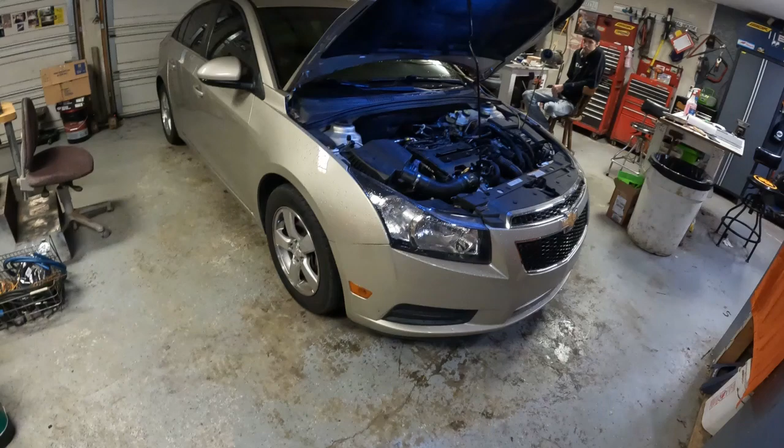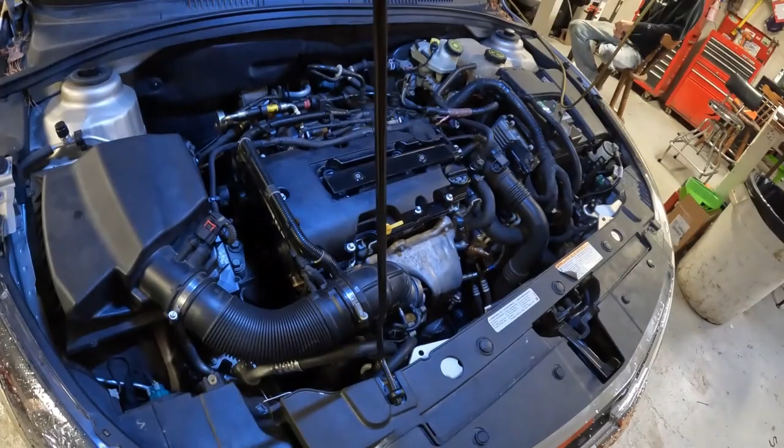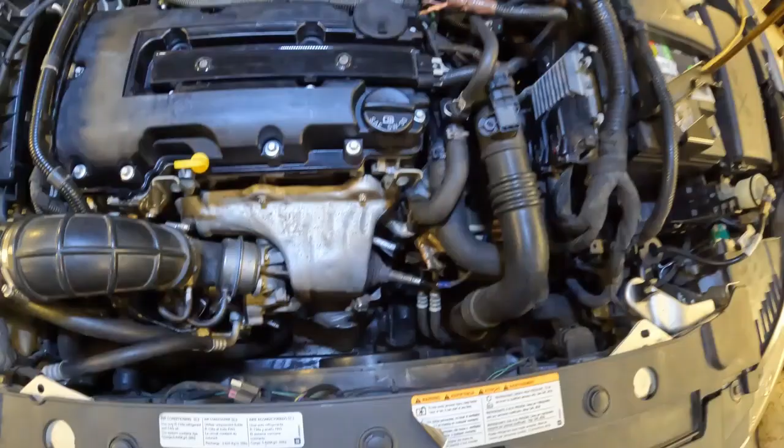This is the 2014 Chevy Cruze. Has a 1.4 liter turbo engine. We've put a water pump on it. We put a head gasket on it. We put the main housing for the oil filter that was leaking water into the oil. We've put the evap solenoid on it. We put a new valve cover on it.

But when you start changing stuff, if you change it randomly and the valve is out inside of the intake, then it just blows this other stuff out. It blows your crankcase ventilation valve there that's made into the valve cover, so you have to replace the whole valve cover. Then it blows the valve out in this crossover pipe that goes to the intake from the turbo. It's part of your evap system, part of your, I guess, EGR system.

But when that valve blows in that intake, it causes pressure to build up inside of the block, inside of the crankcase. It blows this PCV valve out. It'll blow oil out around your oil cap. And it can cause all kinds of oil leaks, which we've got an oil leak on the front of the engine that's coming out of the valve cover.

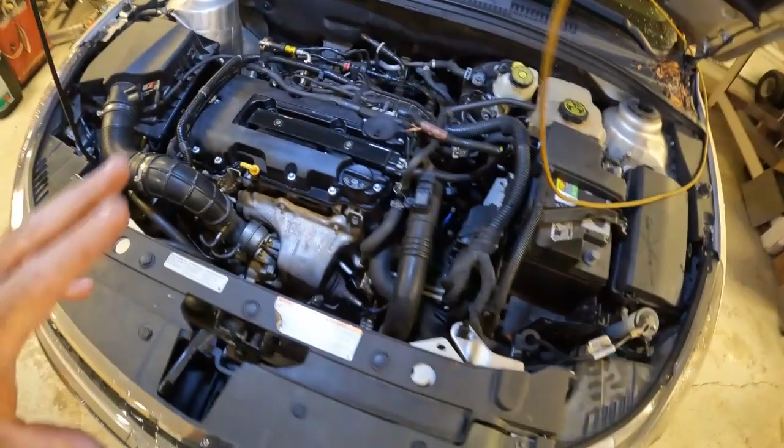So you can chase this like we've been doing. We've been chasing solenoids. We put a valve cover. We've done all this stuff and chasing it. But what you need to do is there's a one-size-fits-all kit for this particular motor. It's made by Dorman. It's an upgraded kit that has each piece, and you replace them all at once, and then eliminates the issue. Let's take a look at the kit.

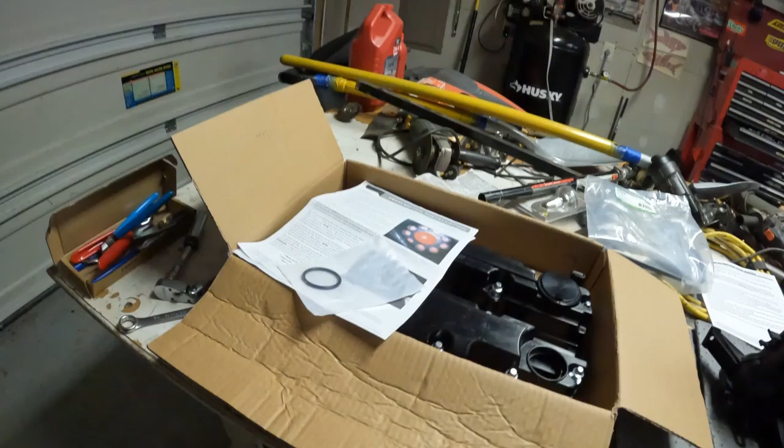This is the kit. It's a Dorman 615-380 kit, and it's for the 2011 to 2016, I believe. 2011, 2016 Chevy Cruze, and there's a bunch of other models that this fits that has this 1.4 Opel motor in it. So there's the kit. It comes all in one box. You get a new oil ring for the oil cap.

You get a new valve cover that has the new crankcase ventilation valve in it. And you have to replace the valve cover, or they sell a little kit, but why waste your time when you can get the entire kit? You also get a new intake that has the new valve in it.

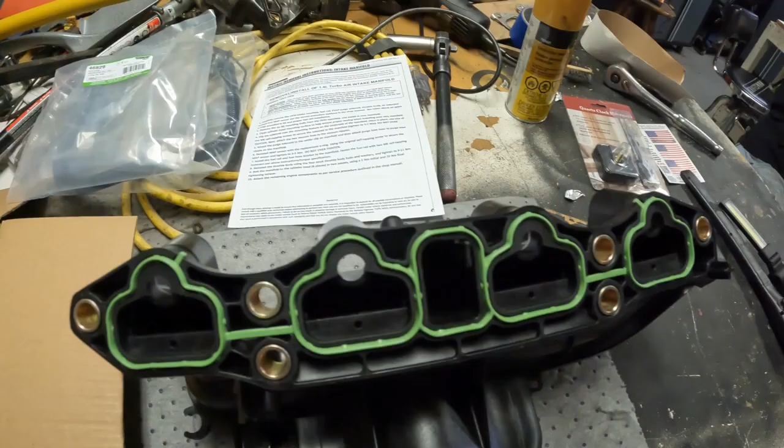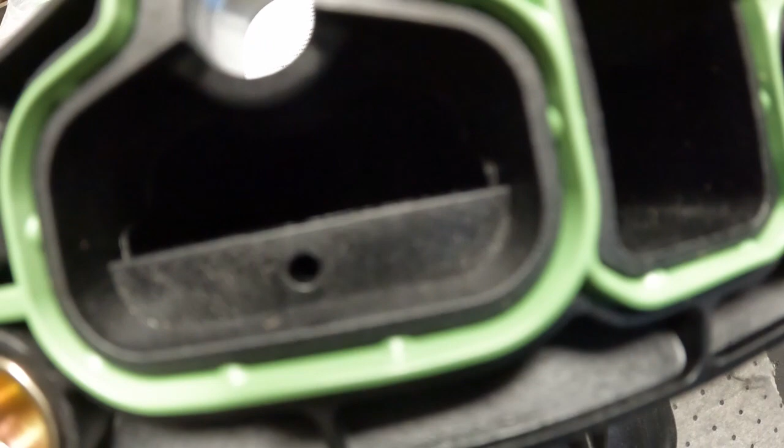And we look down inside the other intake, and that's the first thing you check, if that little orange valve is blown. Let's see if we can see it in this. Yeah, you can see it. I don't know if I can get a light down in there. There we go. Can you see the little orange valve down in there?

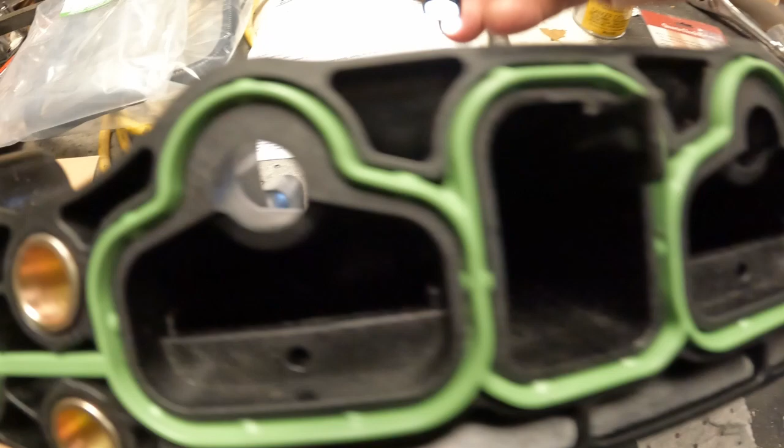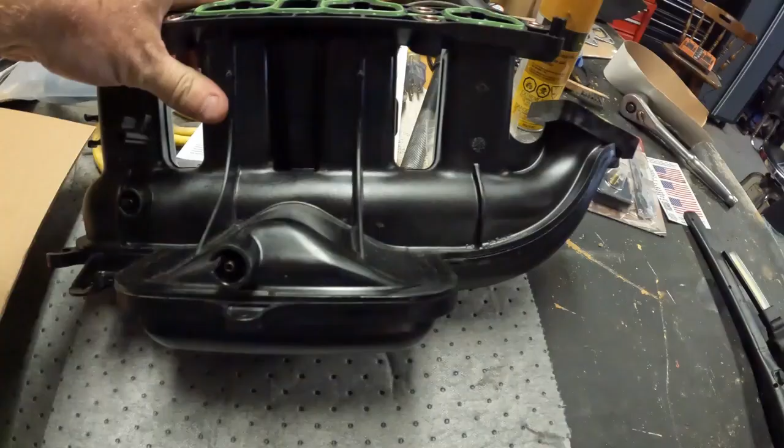Well, that little orange valve, if you look down in top of this hole in the factory intake, and that orange valve is not visible, then you've got turbo pressure, boost pressure going into your engine. It can also, when it's under vacuum, let it pull oil and other things into the engine, when we found oil in the turbo. So when that goes bad, it causes all this other stuff to happen.

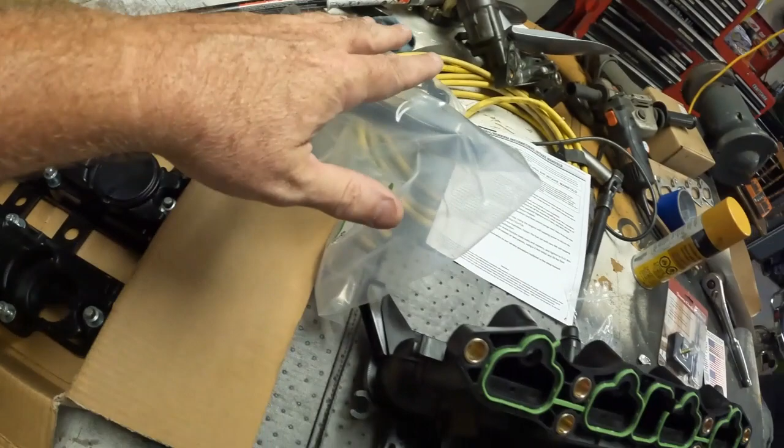This little hose here goes from the turbo. I'm not sure what this hose is called. It has a vacuum line on it, and it's part of your evap system, but it's got a one-way valve in it. And whenever that valve inside this intake blows, it blows this one-way valve out in this hose, and also blows this valve here out. So you end up replacing them all, but if you just replace them one at a time, you're just going around in circles, and you just keep chasing it, but you never find it.

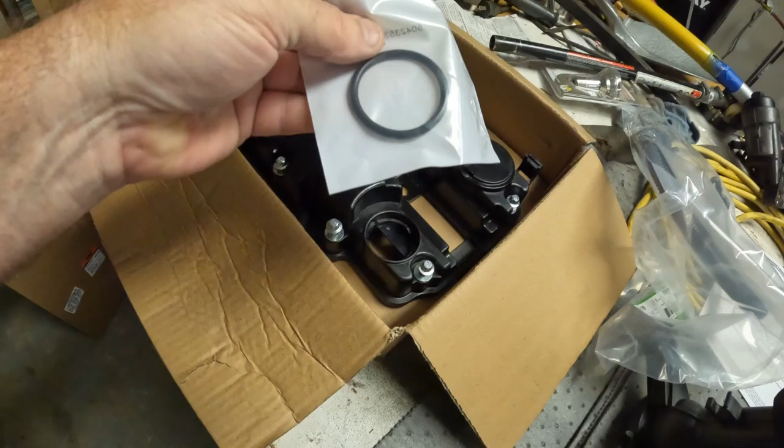But starting with this kit now, and they are aware that this is the problem. You replace the intake manifold, you replace this hose, you replace the valve cover all at once, and of course your oil cap seal, and then you shouldn't have this problem anymore, at least for a while, unless you've got other issues going on with your engine. So that's what we're going to do today.

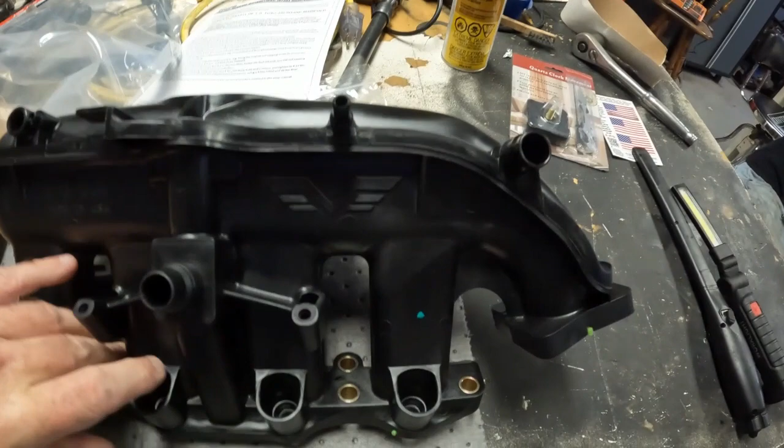First thing we're going to do is drag this intake off. Got a few things to disconnect. You do have to take the injectors. I'm hoping we can take the injectors off of the intake and replace them right here on the table. Tyler's removing the fuel line. We've got some of the other lines loose. We got one of them little tools that should pop it right up off there. Careful, it'll probably spray fuel on you. Be sure to disconnect your battery whenever you're fooling with this stuff. Always do that first.

Okay, Tyler's already taken the air box off. He's taken the intake tube off that goes from the air box to the turbo. You can see down in the turbo there's oil. There shouldn't be oil in there, but it's coming through this tube right here. That means that one-way valve in this tube is probably blown.

So this is one of the parts in that kit. You've got to take this tube off and replace it. So that's the first thing he started doing. It's got a little vacuum line that goes down underneath the intake that's got to come off, and then this piece will be off here. We're going to start taking this intake off, and then we'll be back.

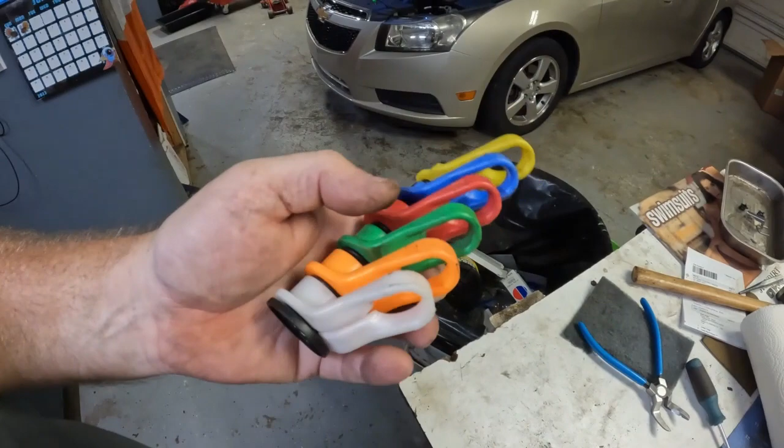He's got the fuel line off. They sell these little kits right here. I think this one came off the Mac tool truck or Matco one. They're cheap. They just go up inside that fuel line so you can lift it off. They release a little clip inside of it. These are made for all different size fuel lines and all kinds of different lines.

Okay, we've got the intake off. Getting the intake disconnected was no problem, but the stupid clips that hold the wiring harness to the back of it were a pain in the butt. So Tyler's going to take this valve cover off, and he's got to take the coil out. And here's the other one. There's a whole bunch of stuff that's got to be transferred over to this new intake.

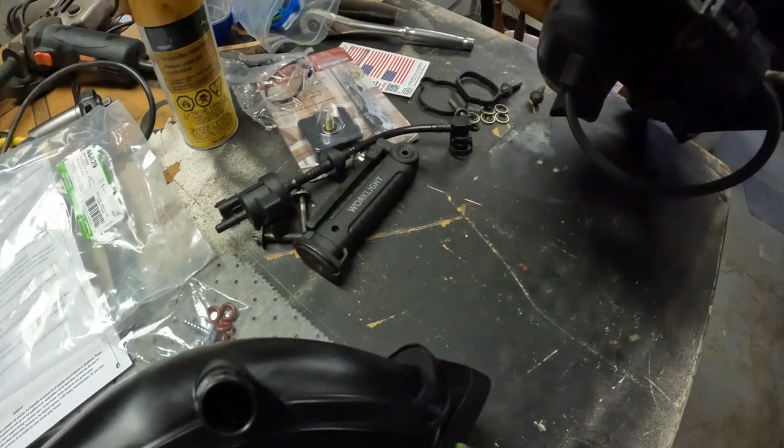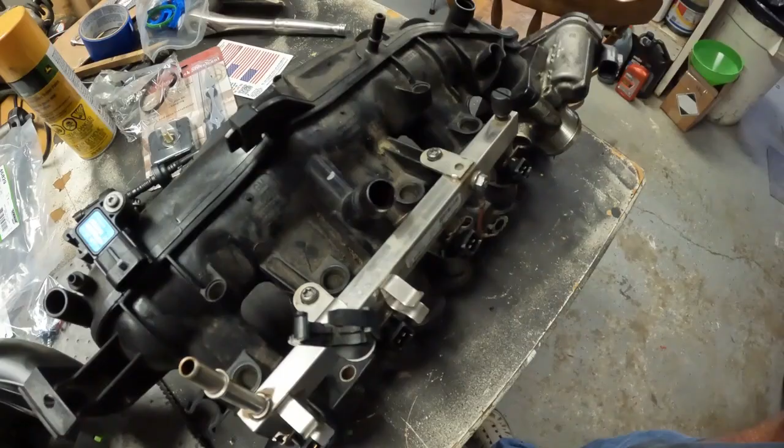You've got the fuel rail. I guess that's mass airflow. There's a couple other things. I guess this little rubber grommet. This little thing. There's some more valves on the bottom. And I'm probably pouring gas everywhere. A couple hoses and a valve on the bottom. And that's about it. What I'm interested in is that little orange thing in there. It is gone.

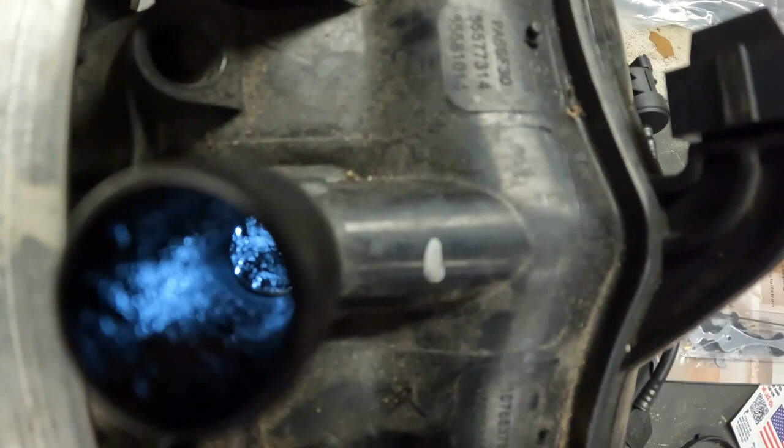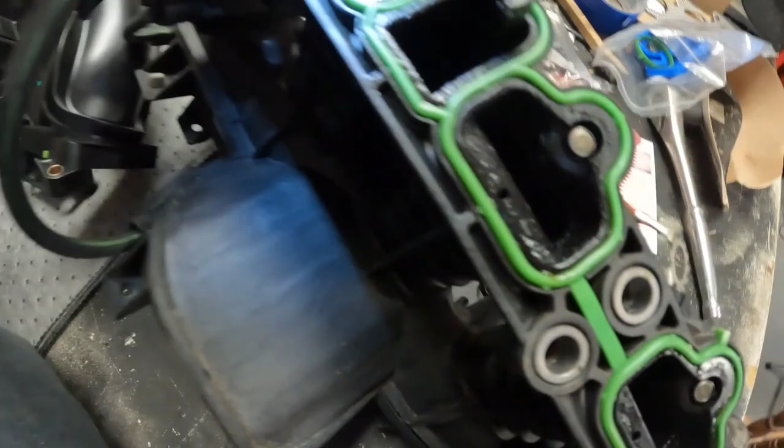Get it where it'll stay here. It's a Bosch fuel rail. You look down in there, it's hard to see. There is no orange diaphragm. Let's see if I can shine down this way. Look at it without pouring fuel everywhere. Yeah, it is gone. So that was eaten by the motor, and when that blows, everything else goes out. Starts messing with everything else.

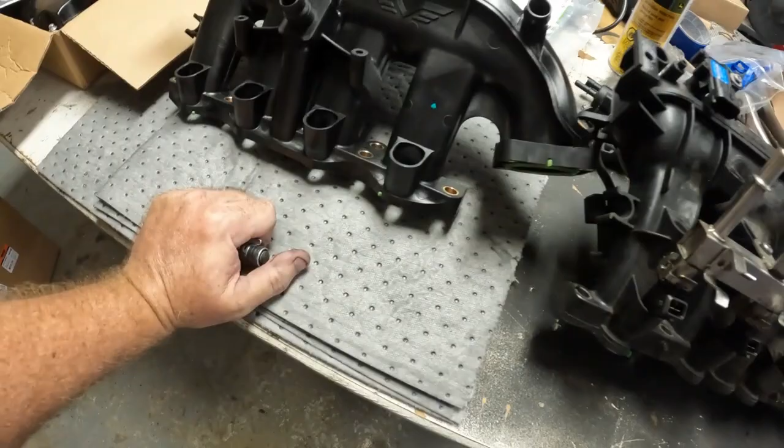So I'm going to get started switching this stuff over, these injectors, to this new intake, and Tyler's going to get the valve cover off. And we're going to take a look at the motor when he gets the valve cover off, and we'll come back then.

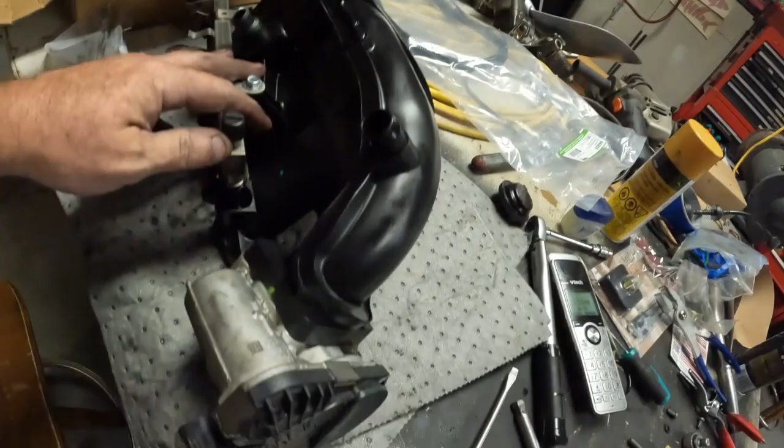Tyler's putting our valve cover back on. While he's doing that, I switched this over. We put the fuel rail on, I guess map sensor, throttle body. There's a little piece in here on the bottom that goes on a little vacuum solenoid. And all that's on there. Put the fuel rail in.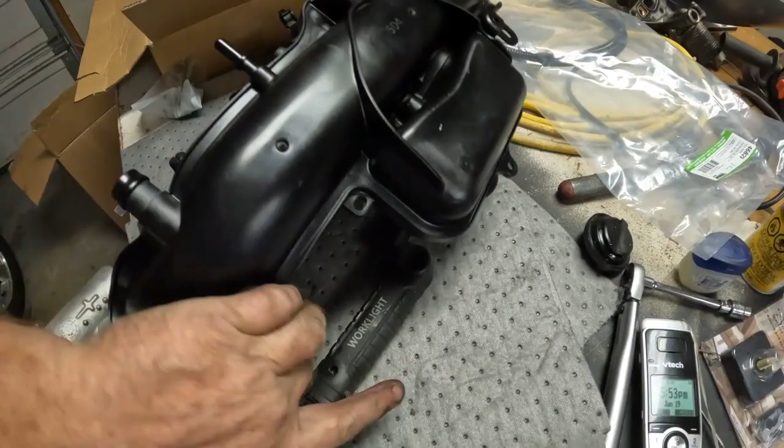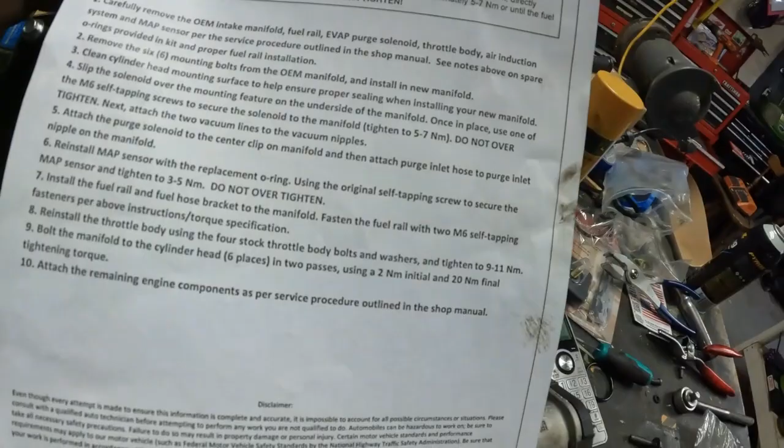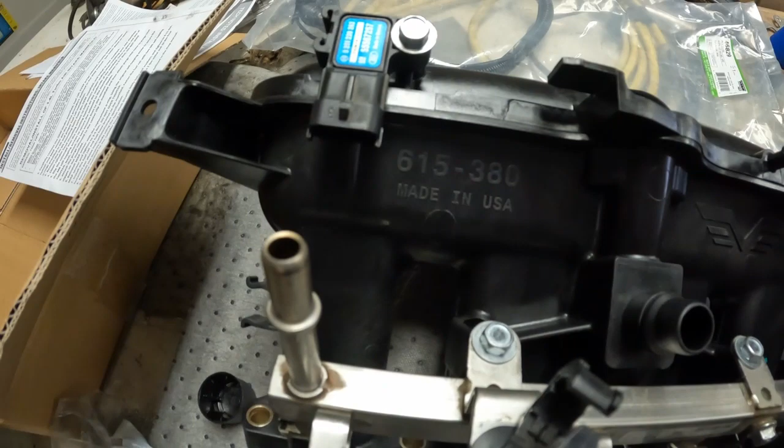Now the cool thing about this kit is you don't have to have a manual to use it, because it comes with all your torque specs. It only gives Newton meters, but that's fine. If you've got a little inch-pound torque wrench, you can use it in Newton meters. And so we put the little bolts in. It does come with self-tapping screws rather than the threaded inserts in the factory intake. But this intake does say made in USA. It's a Dorman product. And so far everything fits nice.

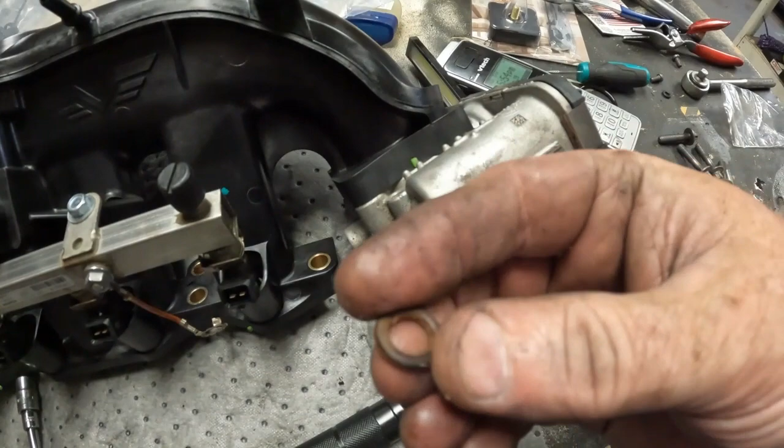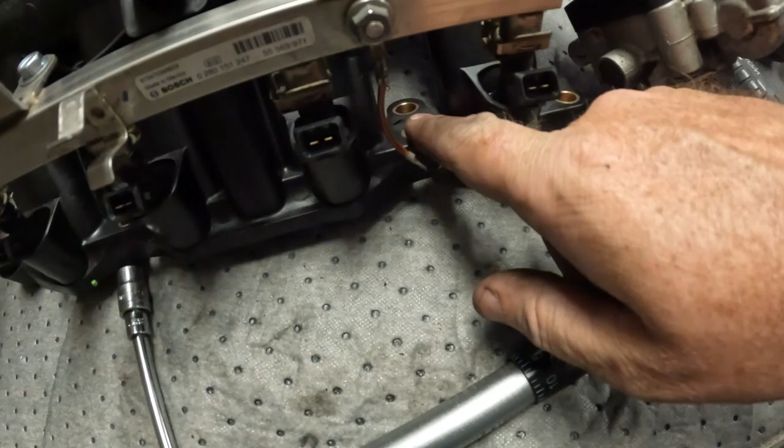Everything went in. It does come with new O-rings for your fuel rail. You can take the old O-rings off. I didn't realize it had those, but it had a little bag of O-rings and screws in it. And we've got these intake bolts. Six of those intake bolts go in, one on each end, and then four in the center. And he's just about to get the valve cover on. And in a little bit, we'll get ready to start putting this intake on.

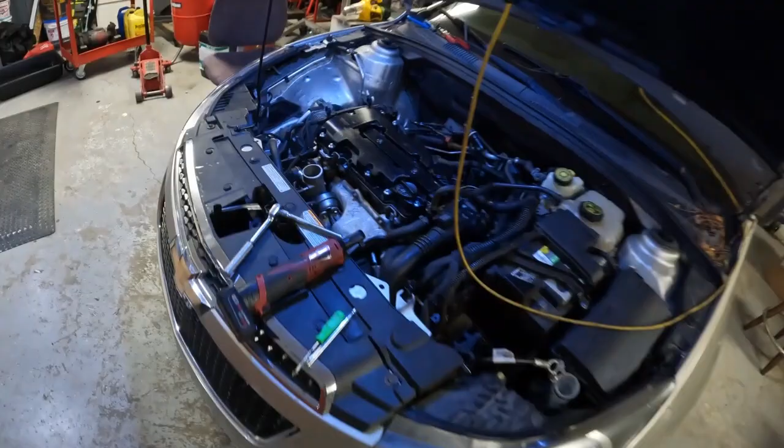Okay, the valve cover's back on. A new O-ring on the oil cap. You've got to make sure you put that on.

Now, I'm losing more batteries than I am time on this.

Now we're going to go ahead and try to get this intake in, now that we've got everything switched over. The intake manifold is back on and reconnected. There's a few little things under the bottom that you have to put wire ties on. And Tyler's hooking the cold air intake up now, the cold air that's coming from the intercooler. So he's getting that side done, and got a few wire connections made.

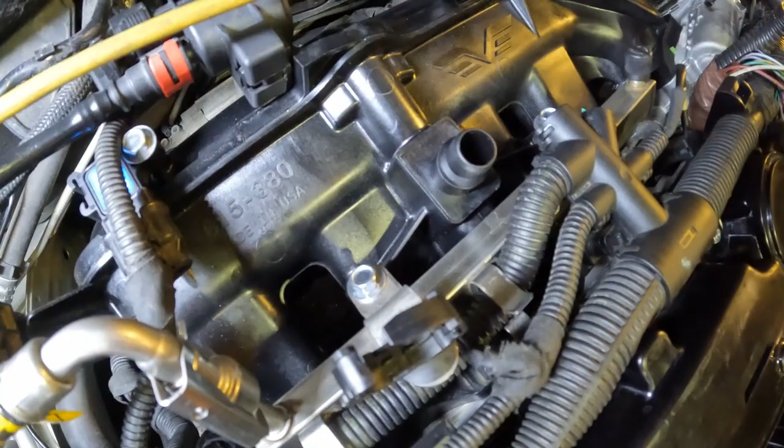Now we did have to torque this. You have to have an inch-pound torque wrench. You start off when you put your bolts in. There's six bolts, one on each end, and then four in the center. Those bolts will torque to 2 Newton meters initially, and you get them all seated at 2. Then you go back through and torque them again. Start from the center out, and in a spiral pattern, torque them to 20 Newton meters, and that'll get your intake set.

And you got to have an inch-pound torque wrench. You got to have a few little specialty tools to do this job here, but that's really one of the biggest things, the inch-pound torque wrench. I just bought a cheap one. We already had one, but it didn't go down to 2, so we got a smaller one.

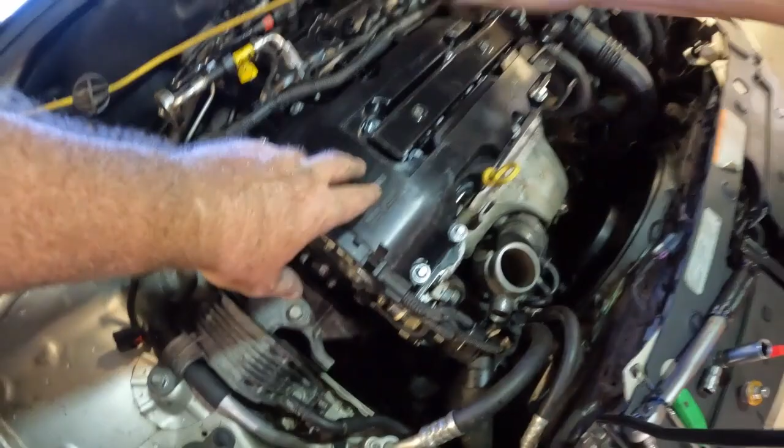But now we got to put, I guess, the air intake system back on. Then we got to put that crossover pipe, that little pipe that we told you the valve goes bad in. So to recap, we put the valve cover on. We put a new intake on that's, I guess, a newer design from Dorman. And then we'll put that crossover pipe in. It goes from the turbo back to the intake. And that should fix all of our breathing issues and keep it from squirting oil out everywhere just because it's overpressured inside the block.

Here's our Dorman part that came in the kit. It's that little crossover pipe. I'm not sure what this little pipe's called. Maybe it says up here. PCV hose is all it says. And that's the part number, 46829. It's a Dorman product. Of course, that's made in China.

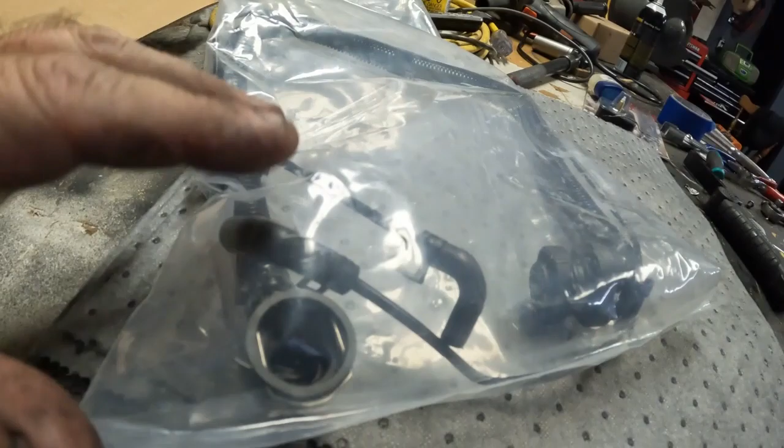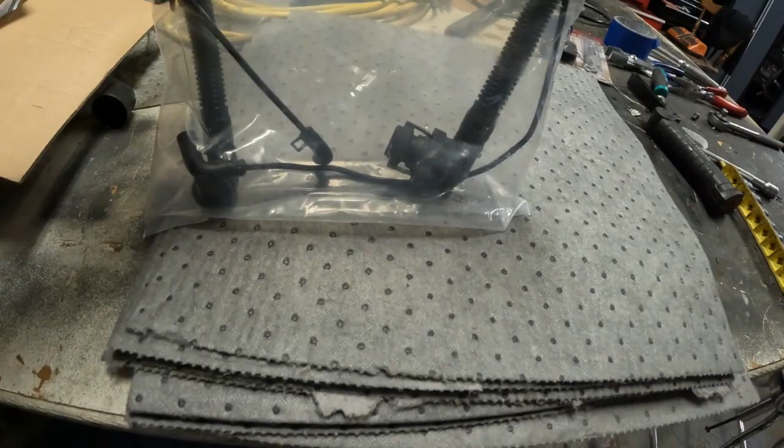But all it is, it's just a little hose with a vacuum line on it, and it has like a one-way valve in it that, I guess, keeps boost pressure from going into the block when the engine's under vacuum. I don't know exactly which way this tube works. I don't know if it keeps boost in or vacuum out. But we're going to put this on. It did come in the kit, but you can buy it separately. But there's no point buying all this separately when you have to replace every one of these pieces anyway.

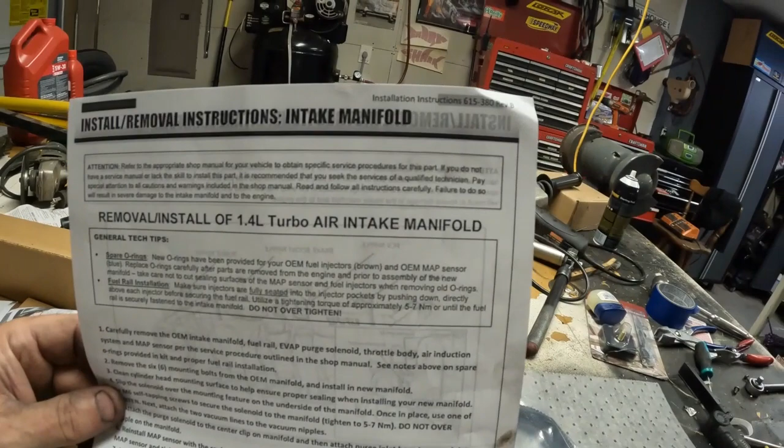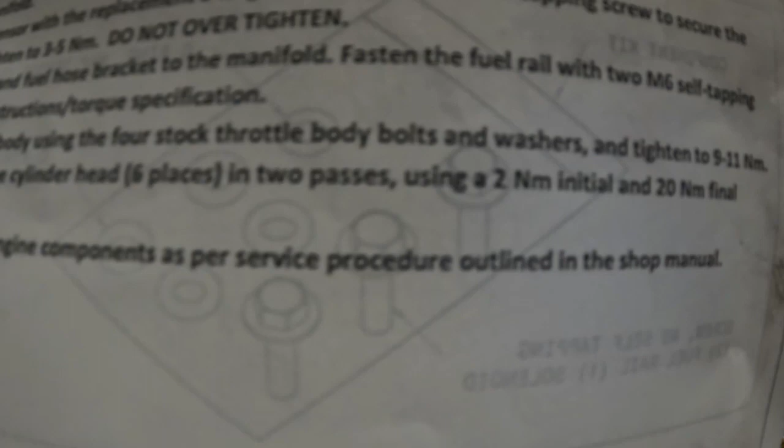And like I said, it comes with the little instructions for the 1.4 turbo air intake manifold. It has all your Newton meters for each part. MAP sensor tightens to 3 to 5. The throttle body tightens from 9 to 11 Newton meters. Manifold bolts, there's 6 places. You got to do it in 2 passes. You go from 2 Newton meters and then up to 20. And 20 feels like a lot when you're tightening it. It just feels like you're pulling hard, but that's what it says to do.

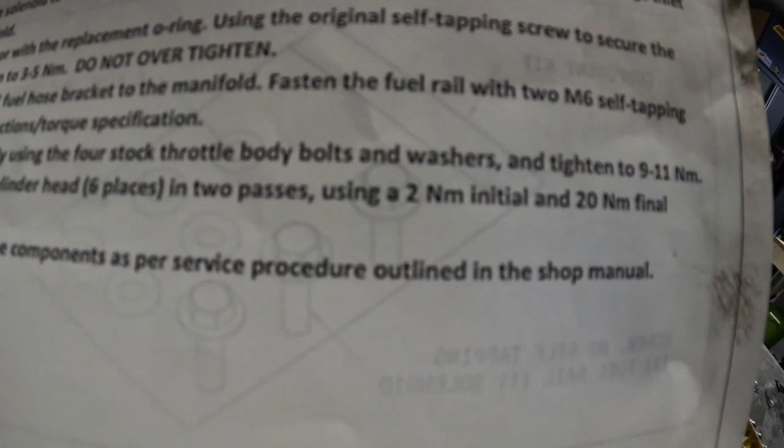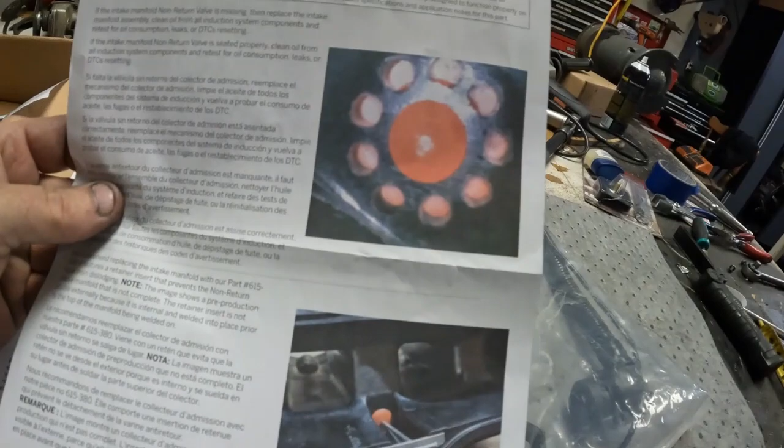You can also use your shop manual if you've got one, but we just followed the instructions here without getting the manual out. And you do need to know a torque sequence on those intakes. It's one of the first things I've got from Dorman that actually had instructions with it. You hardly ever get these kits with any instructions at all, but this is pretty complete, and it had extra parts that we didn't think it would have.

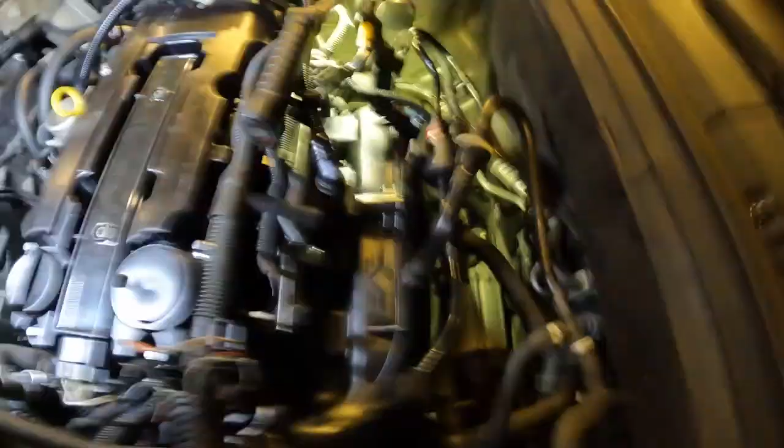The magnet. You know where it went? Mm-hmm. Well, anyway, I think we've got everything back together. We've got that little crossover tube on. This thing's magnetic. It ain't gonna stay. Hold on, we need to find that magnet, Tyler.

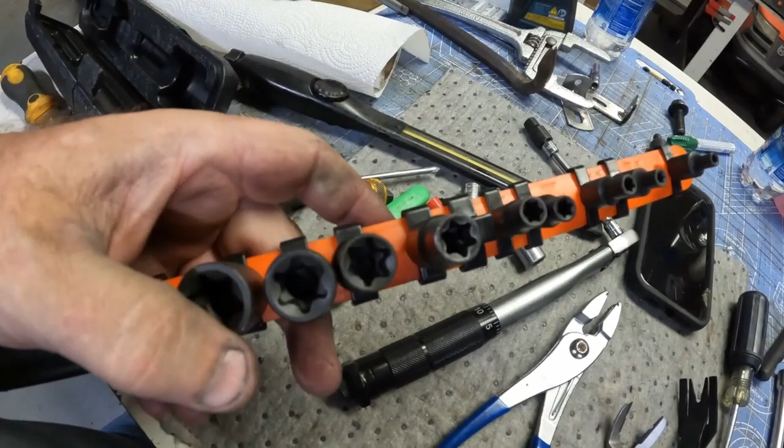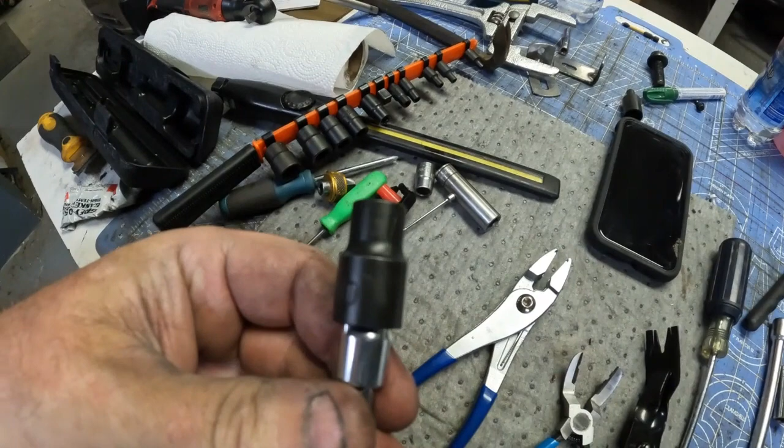Now, I said a while ago we had some specialty tools, and these are those. External Torx. I think it was an 8mm that we were using, Tyler. This external Torx. It's a 10. It's an E10. It's different than a 10mm. It's an E10 external Torx. And we did have to get a rack of these for this car. If you're ever going to work on one of these cars, you're going to have these Torx bits. There's just no doubt about it.

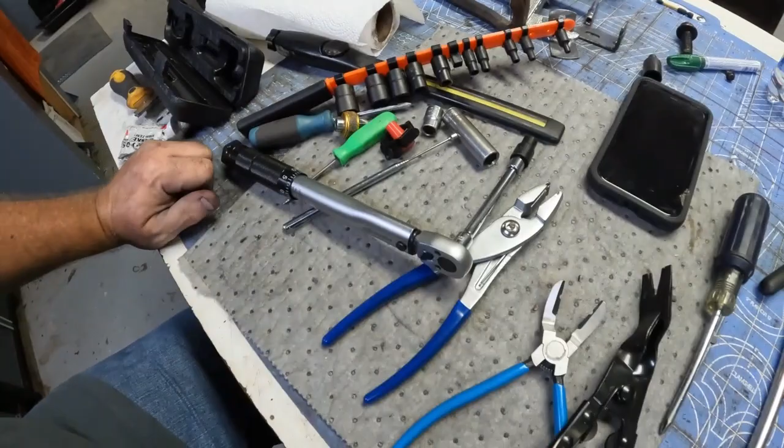And we use these pliers. These are like line clamp pliers for those compression clamps. They've got a slot across the end and a slot across the side where you can get in there and grab those clips and they won't spring out of your hand. These have been pretty good pliers. These you don't have to have, but these are for cutting those push pins loose that you can't get loose under the intake. You just reach back in there and snap them.

Or you can use these push pin pullers. If you can get this under the push pins, it'll pop them right out of the intake. Then they might be reusable. But unfortunately, we ended up having to cut them because we couldn't get it loose. These are optional, but they're handy to have in something like this. You got to have this little torque wrench. Of course, you're going to need a magnet. Just admit it and face it.

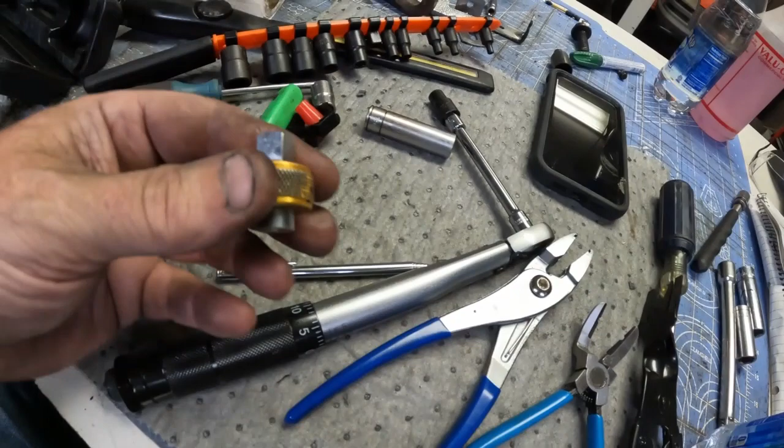Stuff's going to fall. Another thing we were using is this little speed socket. You can reach in there, and whenever the ratchet won't work, you can take your fingers and spin the extension or the socket. And that's just a few little things that we had to have. We didn't really need anything else special other than this, some Torx bits and these external Torx. And that's about it. Looks like Tyler's got the intake and everything back on, and the air box.

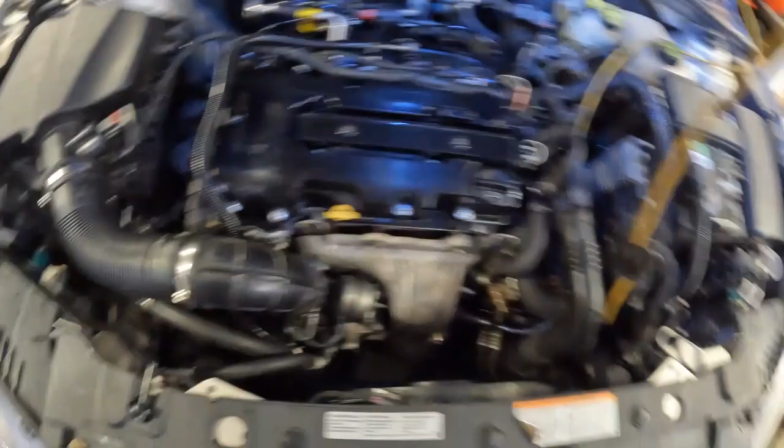But he's probably gonna have to drive this. It's had some oil in the intake system, and one of the biggest codes we've been getting on this car is catalytic converter efficiency low. We've been getting that for a while. And it's also had a little whistle, and the whistle is that valve cover will blow out that PCV, positive crankcase ventilation. It'll blow out and it'll whistle whenever you're driving. It sounds like the turbo whistling, but that'll chirp.

And I think we've got everything put back together. There might be our intake line or something under the bottom. We'll use a mirror and look down there in a minute with a light. And I think we've got everything plugged up. We don't have the little cover. I think we've had this valve cover off so many times that we broke the cover, so that's something I could pick up. It's very cheap on Amazon, and we just got tired of trying to make it stay on, so we just gave up and left it off.

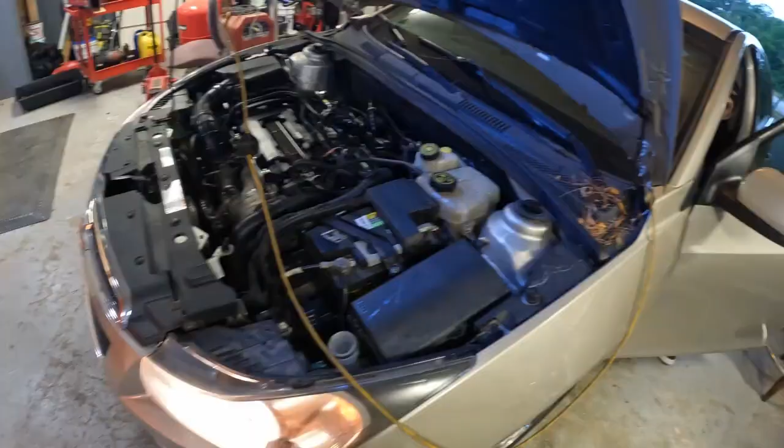Fuel lines back on. That's another thing you'll have to have. You'll have to have a specialty fuel line tool to get those off. You can get those at any parts store, and they're pretty cheap, just little pieces of plastic. But I believe we're ready to go. Tyler, you wanna? Well, the battery cable's off. We'll get this battery cable on. We'll start it up. Here we go. Well, no whistle, no chirp.

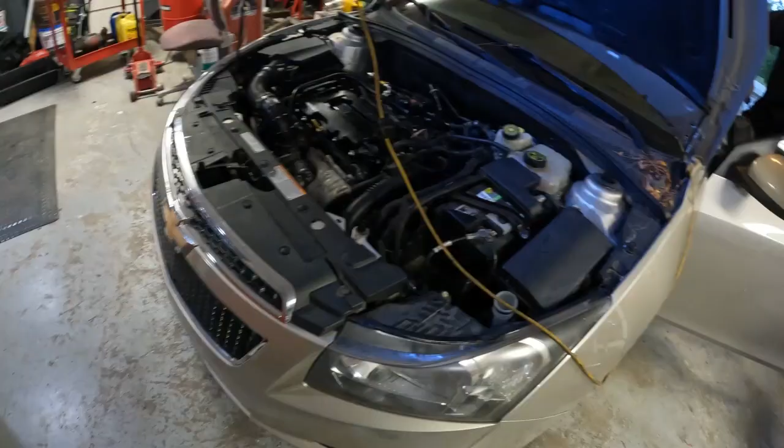Oh, let's try this again. We didn't have this hooked up. It started revving wide open. Oh, now it's going to be hard to start. There it goes. Looking like it's running wild there for a minute. Everybody misses stuff sometimes. Yeah, that's why you check and double check. That's not clicking anymore. That evap solenoid or whatever it is. It's really idling down now.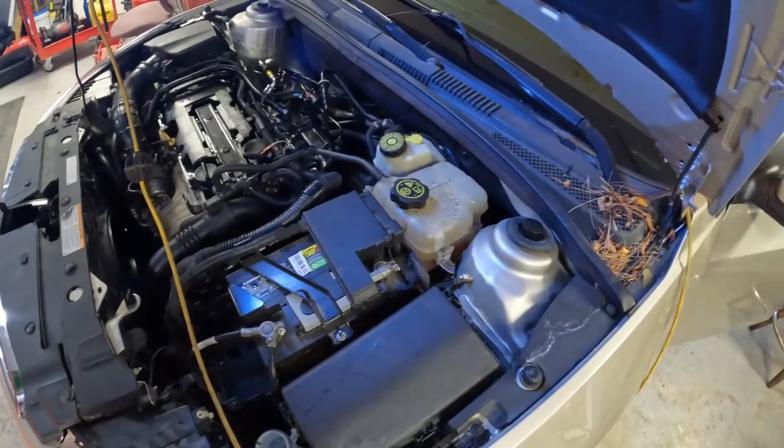Now he's gonna have to drive this for a few days and let it clean itself out. There's oil in the catalytic converter, of course, so the efficiency is gonna be low, so it's gonna keep the check engine light on. He's got a computer in there that he can go in and clear all his codes and read his codes. He carries one with him because we've had so much trouble with this thing. We have to keep the computer in the car just to keep it going. But now we should have this taken care of.

We've got the new intake on it, new valve cover, and this crossover pipe here, whatever it is, but it's got a one-way valve in it that has to work. And I think it was pulling oil right out of the intake, pulling it right into the turbo when it was under vacuum. So it's crazy stuff. But let's hope that we've got it. We'll check it around here in a minute and do our final thoughts in a minute.

Okay, final thoughts on the Dorman kit. Let's see what that part number is again. And it's still daylight. We got done while it was still daylight. That never happens. It's a kit, 615380 kit for the intake manifold and valve cover kit. It's an easy fix. It's pretty comprehensive. If I can understand it, anybody can. And it comes with all the instructions, some pretty easy instructions.

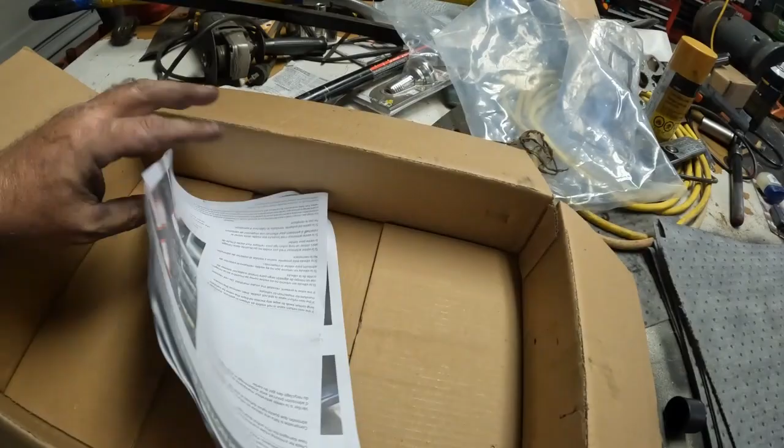It tells you about the O-rings. It's got a few warnings here and there, but it's pretty easy. Even the box has a bunch of warnings on it. When installing, check intake manifold for failure. We did. Our manifold had failed, and of course we had everything we needed. We just had to provide a few tools, but it worked out good. So this is our, what is it, 2014 Chevy Cruze?

And we've done a lot of work on this, and they're very popular videos. The video we done on this thing, what was it, the coil pack? A lot of people watched that video and commented on it, and it was a quick fix, but it wasn't a permanent fix. We unplugged the coil pack, cleaned the coil pack connector, plugged it back up, the car fired right off and run right on. But we wound up having to change that connector in the end because that's where the short was.

The pins had de-pinned themselves a little bit, and the pins wouldn't stay in, so we just bought the whole connector and put a whole new, I guess, female plug on it. But that made that work. That's a popular video, but it does get you home if you're in a jam.